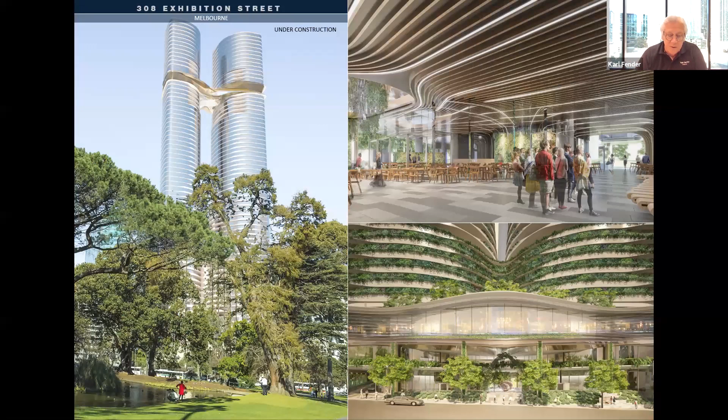308 Exhibition Street, under construction, paired a residential tower with a hotel and linked them with a sky bar for the public. And it took the parkland down below and ran it into the podium so that the base of the building became very much at one with that part of the city.

And this particular one, Queen's Place, also under construction, these 2 towers have got an incredible base full of home offices, studios, etc., and arcades. Melbourne's really well known for its arcades. So although these buildings become emblematic in the city and really give strength to the character and reputation of the city, it's the ground plane that really is important.

And I think that these buildings, plus others that we've done, really prosecuted the touch points of high rise and high density in the city - the building as a marker, the building providing mixed use, the building providing population to incentivize the public realm, and beautiful things for the public at the public realm.

These were all really extremely relevant pursuits or investigations with respect to Merdeka 118, as you'll see as we go through. Just very quickly, yes, we were designing the building from Melbourne, but Melbourne and KL, or Malaysia, are really quite close. We are just a 7-hour flight away from each other.

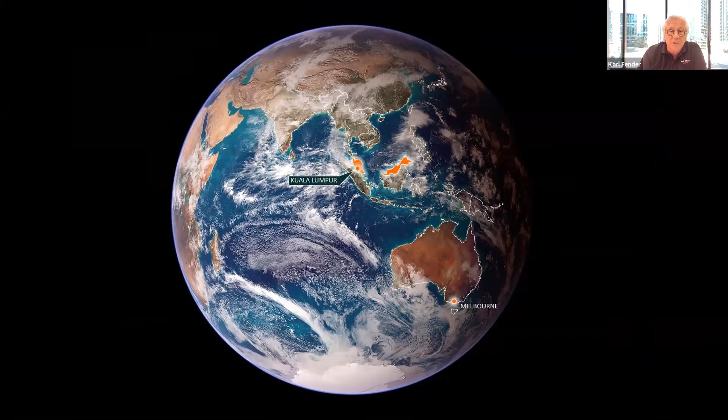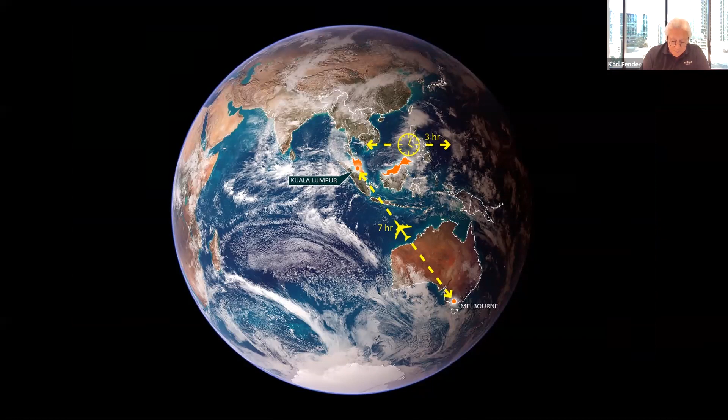We have a 3-hour time difference, 2 hours when there's no daylight saving. And so this was a very fluid and easy relationship to work with our client and with our local partners, GDP and RSP. So this was really lovely for us.

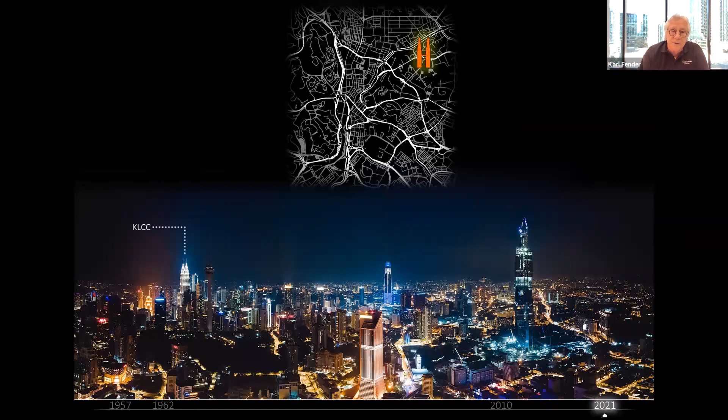We found coming to KL, what an amazing city. Love that city. It has so much intensity and vibrance.

And the buildings that came before it, the tall buildings, the Petronas Towers, the KL Tower, and now we have TRX - they've become icons in the city. As a visitor, I get a bit confused in KL still, I have to admit, because it's organic and there's a lot of traffic and a lot of trees, and using these major towers as kind of shapes in the distance orients me to where I am. And I really do enjoy that.

And they're starting to frame the city. They're starting to stretch the city. They're starting to create more energy at the base of where they occur, both TRX and Merdeka. And so this particular building of Merdeka is very, very important in the growth of Malaysia.

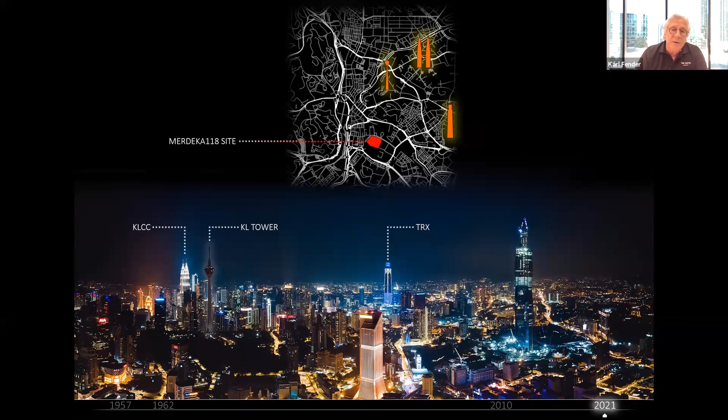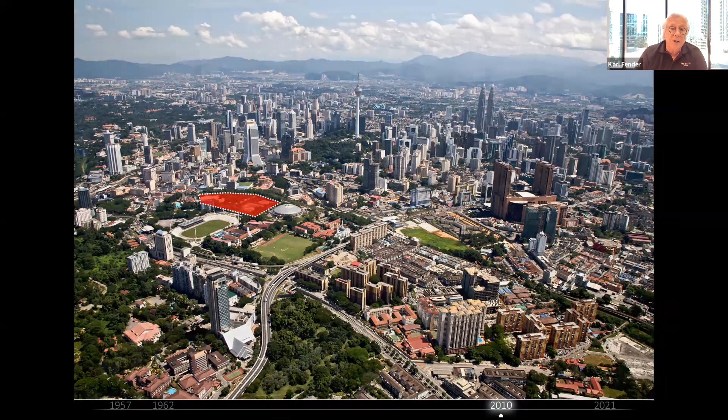But what a challenge - what a challenge to be putting this tower right next to Stadium Merdeka, where Tunku Abdul Rahman declared independence in '57. He must have been a great man. As the first Prime Minister, he states that he wanted to see a modern future for Malaysia based on the highly cultural history. And so for us to be putting a tower on this particular site and respecting the nature and history of Stadium Merdeka was really, really exciting.

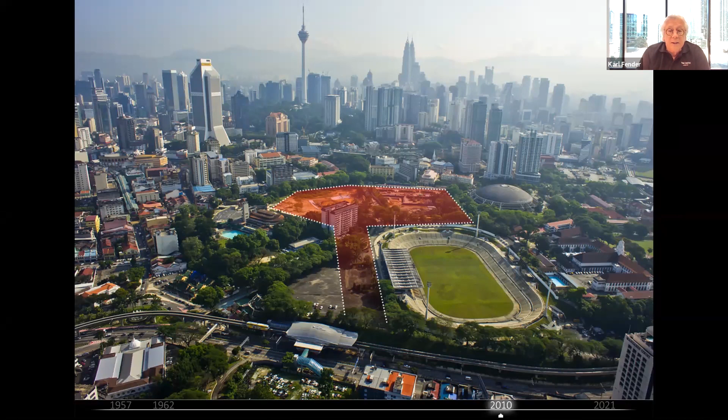The site, luckily, was able to extend beyond and across the front of Stadium Merdeka. So this gave us quite some opportunity to start putting Merdeka back into a nice format - the spirit of the place.

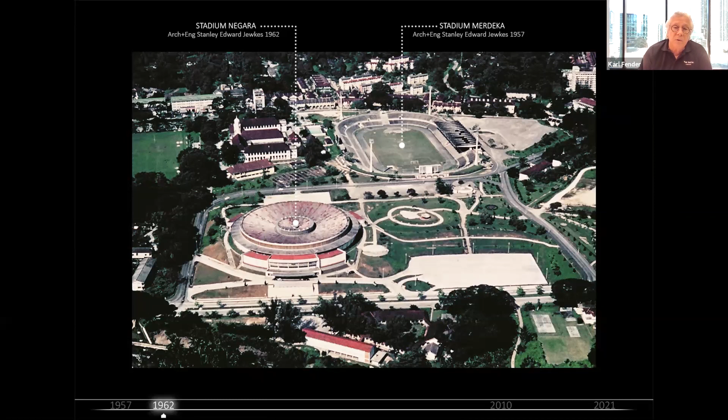Wow. Again, look at Stadium Negara and Stadium Merdeka back in the 50s, well, it must be in the 60s with Negara there. But it's got a park in front of Negara shared by Stadium Merdeka. And this was about community space, community gathering.

But, you know, if you look at it today, or when we first came there, the park was basically nothing - it was just sort of asphalt. And the front of Stadium Merdeka was also just asphalt, had a lot of motorbikes parked on it. And it seemed to have, it wasn't in our mind, but it had lost the importance of its heritage beginnings and what it should be offering to the public. So this was a great opportunity to give back.

And that was part of what Merdeka was all about. This wonderful photograph was very inspirational to us, particularly the raised hand, which now has been attributed to the design of the spire on the building, which is something I particularly love, because it's great when the community and the public start to invest their imagination in your building.

The energy of the place, we're next to Chinatown. That's a beautiful place. My wife loves going there on the many times we come to KL. Bustling, it's a bit interesting and a bit run down in parts, but very much a tourist attraction. And of course, the traffic and the monorail, all of these things give energy to our site, and our presence will help their presence, help the traffic if we handle it right, and help the whole precinct around Chinatown and around Stadium Merdeka.

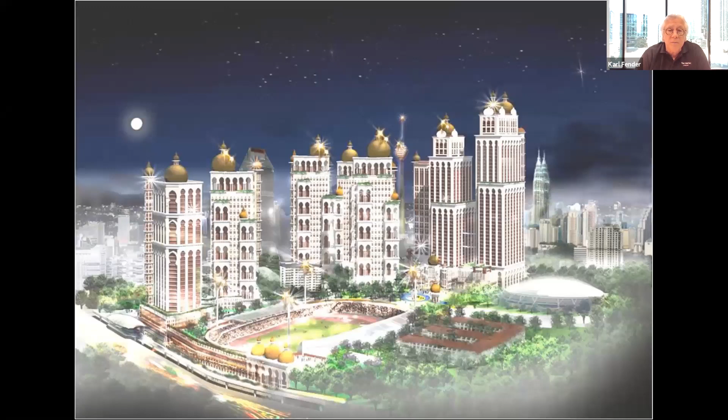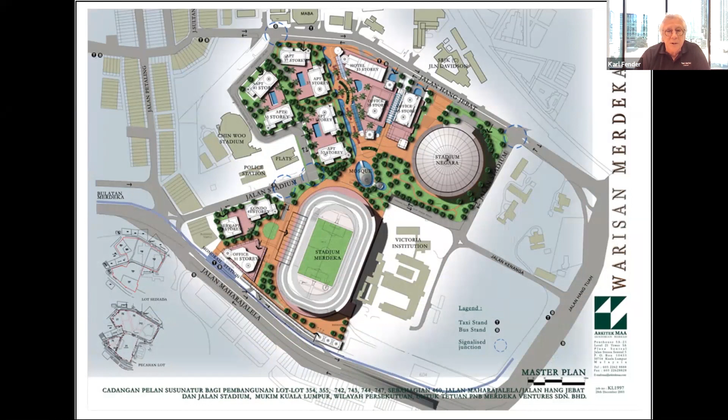When we first started, this scheme was shown to us. You can see there were thoughts about the importance of this site, and this was a campus style of project, and it invested itself heavily on Islamic and Malaysian symbolism. But because it was a campus, the buildings, and there were many of them, were all spread out. And the interstitial spaces between were really just connections, public connections, but no real place for public gathering or making parks.

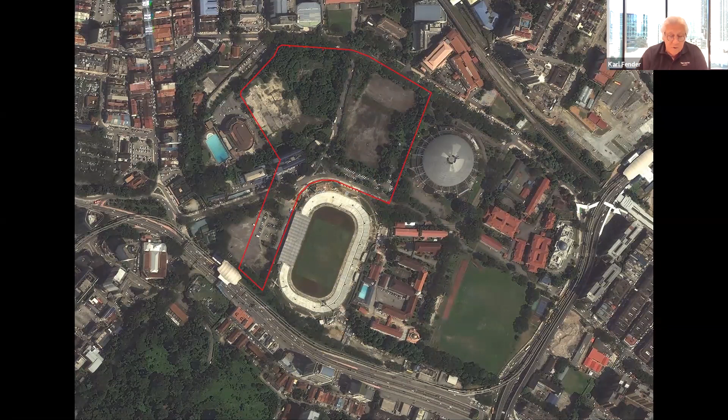So the idea of us coming to this site really was to understand the opportunity of maybe compressing the footprint and allowing a public park, allowing circulation around the building to happen, all to the benefit of the community. And so we had to start with a diagram, and this was our diagram.

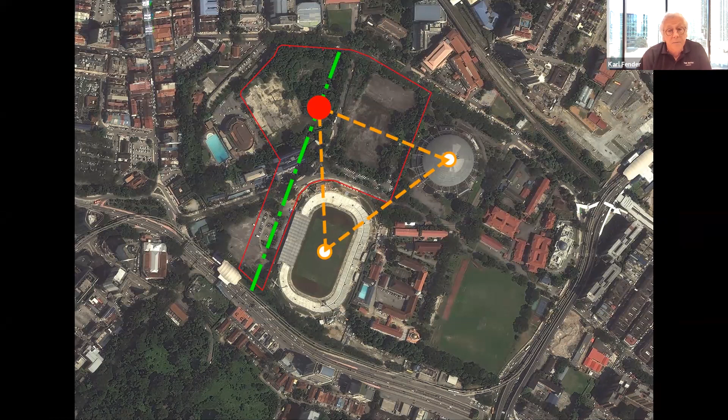And that axis excited us because on the one hand, it could provide a park on that axis to Stadium Merdeka, but it could also run right through the building and make the building available to the public, so that from Jalan Hang Jebat up at the top or the north, you could actually come off that street, come to the building, go through the building, and then go down into the park and through to Stadium Merdeka. And that axis will also provide in the future a beautiful museum by RSP and a mosque by GDP. So that garden that is on that axis will really become a focus and a destination for the people of KL and Malaysia and tourists.

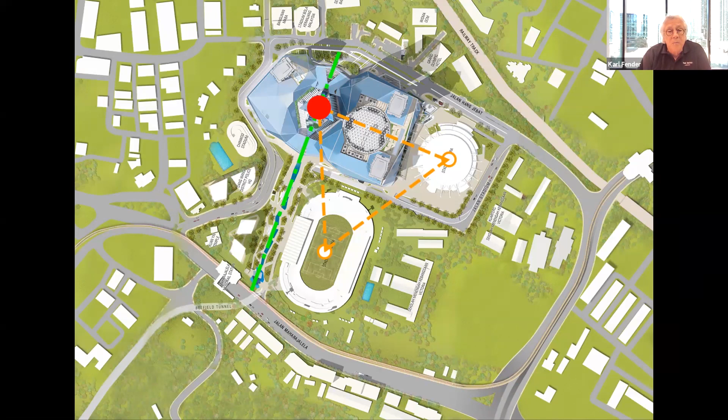And so there's the building in place now underneath the red dot. You can see that next to it is a circle. That's a glazed roof, which is obviously a reference to Stadium Negara, and a big podium containing retail, theatres, ballrooms, lots of facilities for the community. I ended up with the word community.

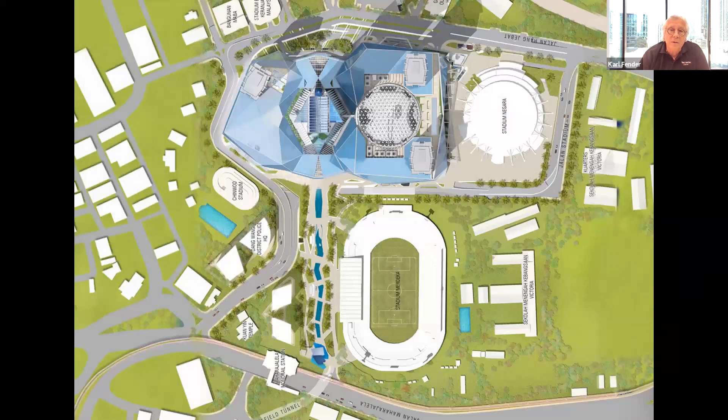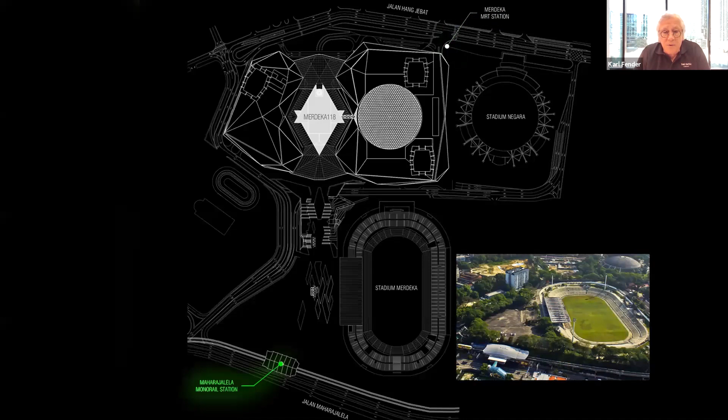The power of projects like this is enormous. And so again, this particular project has brought an MRT. It couples onto the Maharajalela monorail. It provides the park. The park, I think, is about 160 metres long by 60 metres wide.

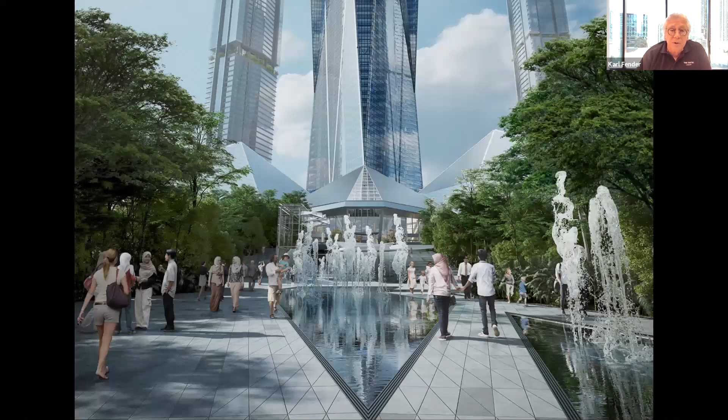It's a beautiful water park with water that comes from fountains, mists, cascades, waterfalls, ponds. And if there's an event on in Stadium Merdeka, the water can be turned off, and we have a beautiful pre-function park for the stadium for people to gather. And you can see here that the park is actually the carpet to the front door of the tower, Merdeka 118.

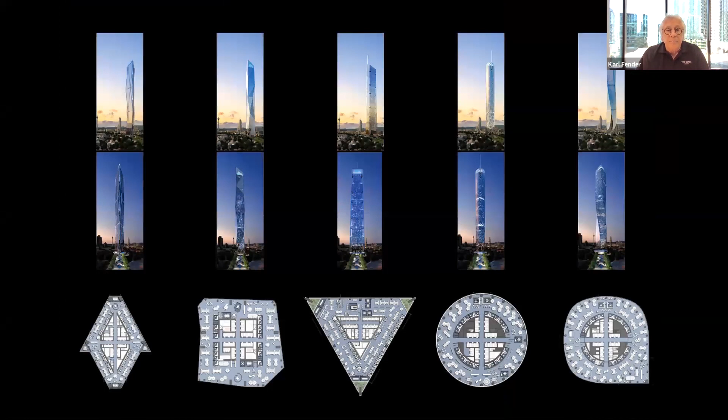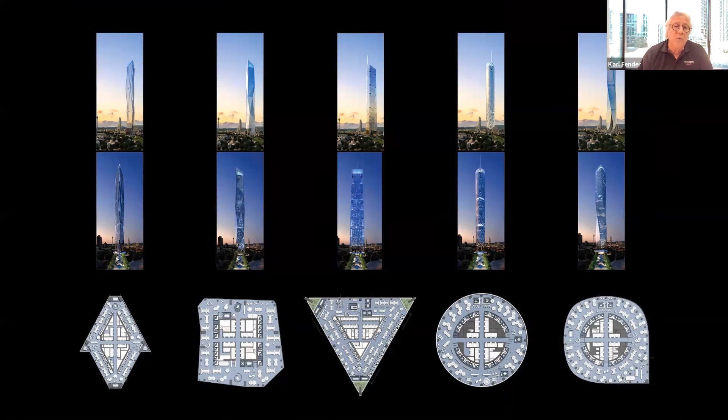We studied a number of different tower forms, obviously, as one does, just in the search for a tower shape that not only was appropriate symbolically in its place, but also disturbed the wind in the right way and became what we felt would be a very, very interesting building in the round, always changing visually as you see it from different parts of the city.

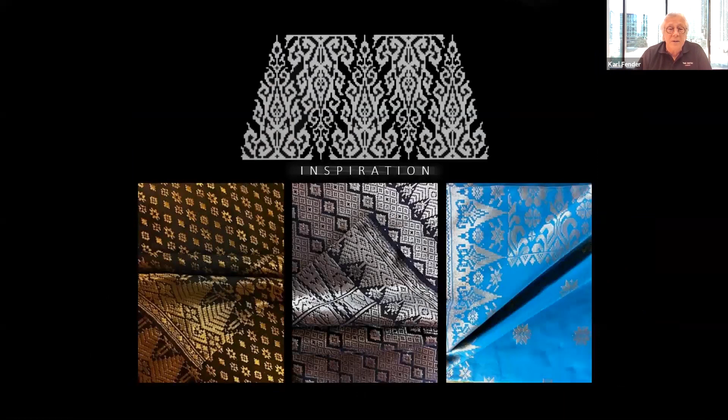And again, the Petronas towers and the beautiful plan forms which come from Islamic patterns, that inspired us, but obviously that's not what we were going to do. We were very interested in the Songket patterns of Malaysia, in the materials and the way that the metallic threads highlight those materials, and the way those materials change in different light and in different shapes.

And that led us to this building form, which is a series of folded triangular plates. We liken those plates to... when I was presenting to the Prime Minister, I said each of these triangles that form the fold lines of the building represent the different cultures and backgrounds of all the people that make the rich mix of the Malaysian community.

And then the fold lines are expressed so that they could be light pathways. So it's a bit like the threads in the Songket materials.

And the triangulation of the tower was then taken down into the podium. Many times the retail podiums of these towers become boxes, just big boxes for internal experiences. So we were very much of the opinion that the podium should form the foot or the pedestal of the tower, and in fact have the same kind of geometrical approach as the tower had.

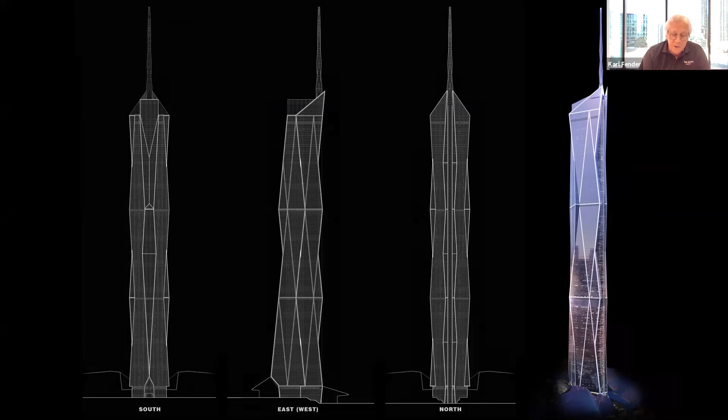And again, this shaping of the building also really helps to disturb the wind, and that decreases the wind pressures on this, which is in fact a 600-odd metre vertical cantilever from the ground. So you can imagine the pressures at the top of these buildings, and the more you can decrease the wind pressure on them, the more efficient the structure can be.

This diagram shows you in section that the building comprises a centre core, but also 3 belt truss zones. And it's in those belt truss zones that the transit floors for the elevators occur.

There are 87 elevators, and just some other interesting facts: 18,000 facade panels. Each facade panel is 2 windows. And 8 kilometres of LED facade lighting.

That's going to be quite wonderful because it can be programmed for different light travels, different patterns, and it will go up the spire as a sparkle type of light effect.

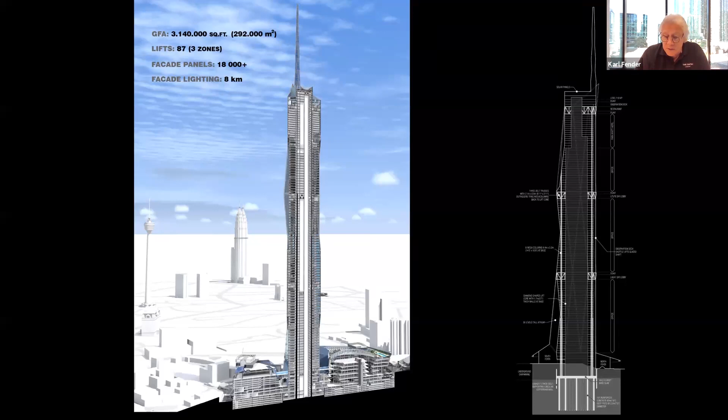Just if you ever ask yourself, how much does a building weigh? This building weighs in the order of 13 Titanics, which is about 685,000 tonnes. These are huge structures, and to watch them being built is a marvel.

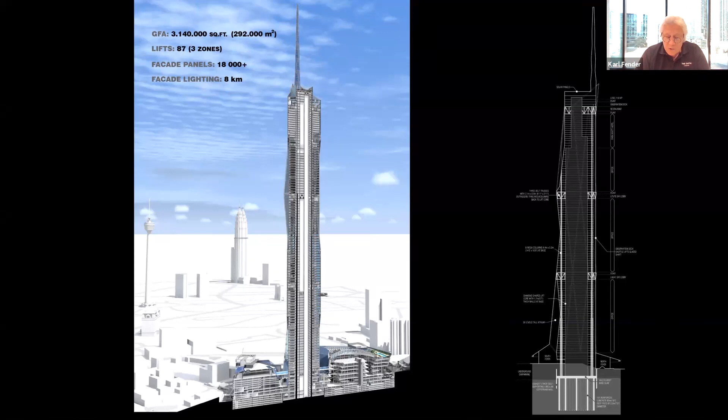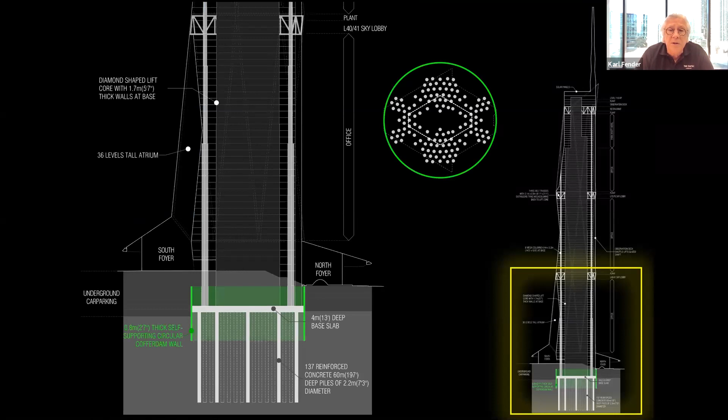If we just start looking at how the building structures, starting at the base of the building, we have the cofferdam. It's about 0.8, maybe a bit more, metres thick, which went 20 metres deep and encapsulated the piles. There are 137 piles.

They went down 60 metres, and each pile was 2.2 metres diameter.

Then on top of the piles is supported the raft slab. That slab is about 88 metres diameter, and it was 4 metres thick, poured in 3 pours: 1 contiguous pour under the building and 2 flanking arc pours.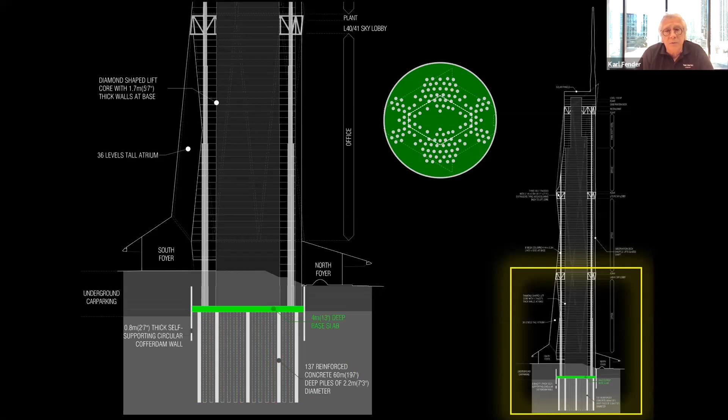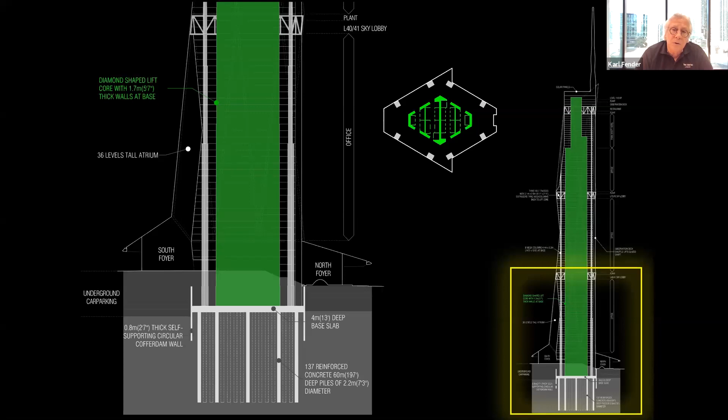The core itself, well, the walls at the base were almost 2 metres thick in a diamond shape, and that created a floor plate, particularly for the commercial, of about 12 to 13 metres deep, which is a very, very efficient, beautiful floor plate depth from curtain wall to core for commercial use.

The mega columns running up the building are 4 metres by 3 metres at the base. And then you see the belt truss zones with the outriggers connecting to the core.

This fantastic diagram just showing you how all of that works. And this, in fact, creates alternate structural pathways, so if there's catastrophic structural failure, the loads can find other pathways and not just collapse.

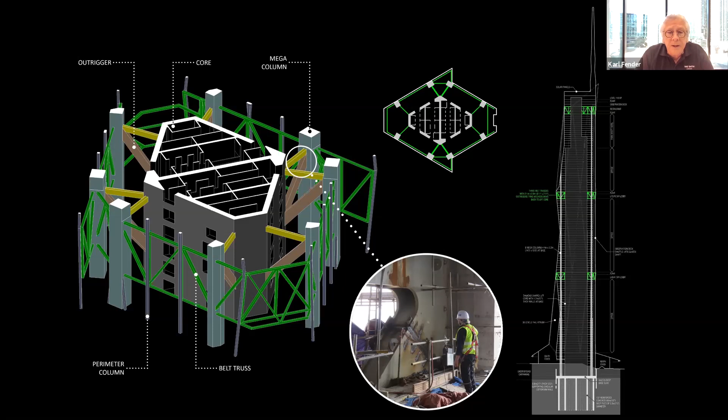Just a photograph at the top of one of the outriggers. The steel in those outriggers is 100 millimetres thick, just enormous.

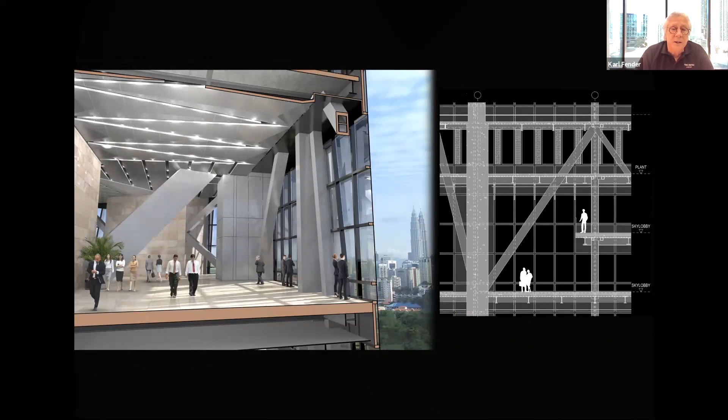And here we have just an artist's diagram inside one of the belt truss zones. They become the transit zones, and that's where you can really understand the strength and structure of the building. So these are fabulous public areas throughout the building.

This just shows you on the left-hand side the green floor plates, the top one for the hotel, the bottom one for the commercial. And the commercial floor plates here, that's the maximum floor plate.

And as the facade of the building expands and contracts, we go from a net floor space of 1,900 square metres to 2,300 square metres net lettable area. And the hotel floor plate has about 20 hotel rooms per floor.

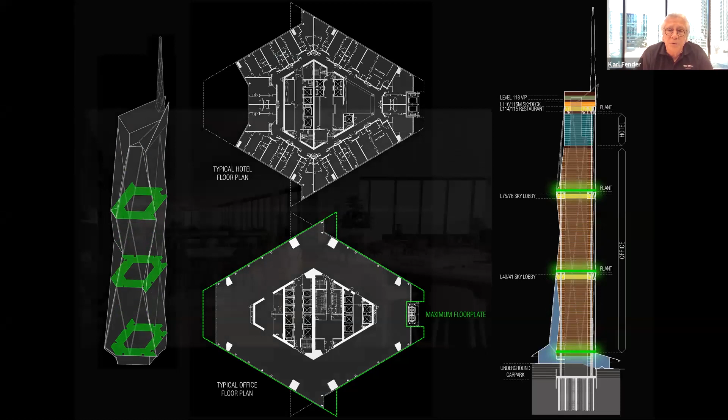The offices are fed with services, air particularly, from below the floor, and the return air is taken out through the ceiling. So personal comfort is guaranteed at any place in the floor plate by personal adjustment at a workstation.

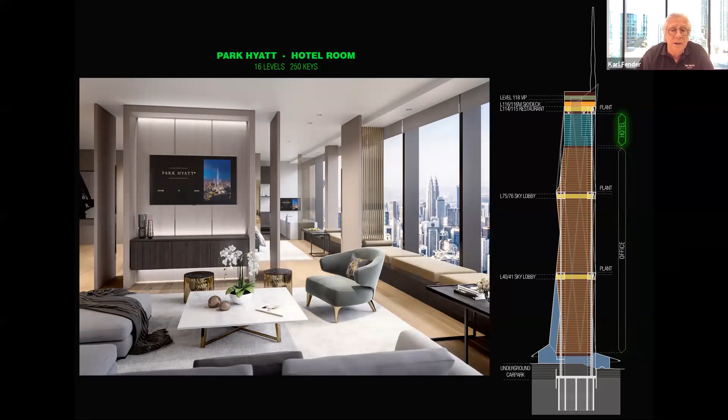A typical hotel room designed by GA Design out of London, with fabulous views of KL, and the hotel reception on level 75.

Once you're in the building, you ride the elevators up to level 75, and that's where you check in. From there, you go to your room in an upward direction.

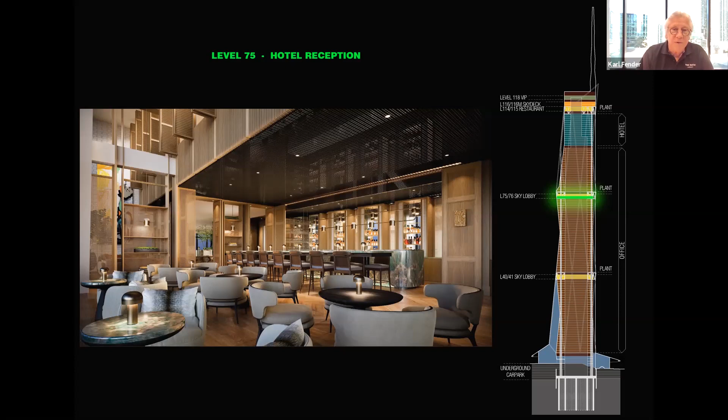Many of you will have been into some of the modern hotels where you go up to the higher level hotel reception, then go down to your hotel room. For me, I always get lost, I never know what I'm doing, but this one is very straightforward.

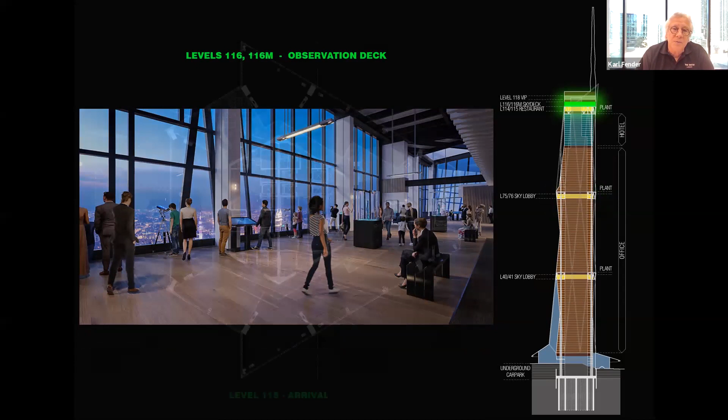On top of the building, again for the public, there's an observation deck. This observation deck is really going to be a fantastic destination for tourists, for Malaysians, for people in KL. It's being designed at the moment, and it's very, very exciting.

Level 115 is where you arrive from these elevators, glass bullet elevators, two-story, which take you to either the sky deck or a restaurant below. And from those elevators, you go up an escalator to level 116, which is the observation deck.

This will be very carefully curated. I think this will be the best observation deck in the world.

The curation is very exciting and will tell some marvelous stories. You'll also be able to step outside and sense the fresh air that the birds sense at that height.

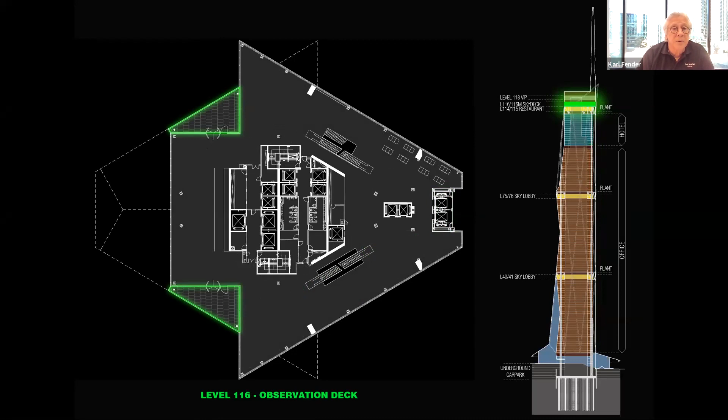From there, you go to 116 mezzanine, and that's a floor of thrills. So stay tuned to that - that will be interesting indeed.

And this section just shows how the sky deck works at the top of the building.

We're going to go down to the bottom of the building, and this is a section through the reception halls. The hall on the right is the one that faces onto Jalan Hang Jebat, and that has the entry for the hotel and the entry for the office and the retail, one of the retail entries.

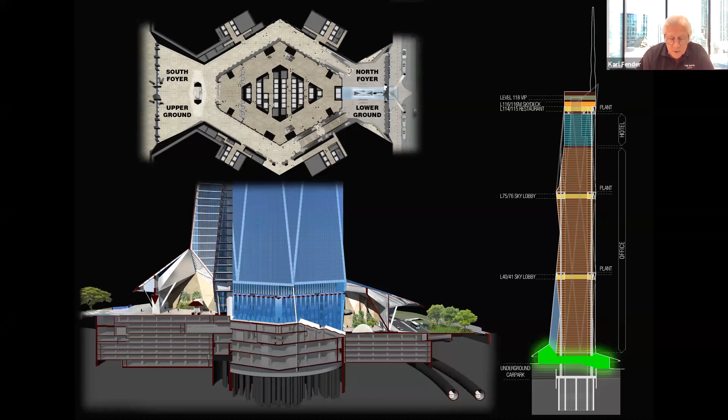You then climb 10 meters up escalators or stairs through a glazed corridor to get to the top atrium reception hall. And that hall faces the gardens, Stadium Merdeka, and Jalan Maharaja Leila.

On arrival, you come under a huge canopy. This is the floor plan of that.

You can see the hotel lobby and the commercial lobby, separated by a fountain, but the volume of that atrium, which is about 30 meters tall in its highest place, stays quite remarkable.

When you arrive at the entry to the building, you arrive under this grand entry hall, which unusually, I think, gives you a view of the building above.

So often you arrive at a building under a canopy and you've then lost contact with the building above. But it's the entry into the building, the thought that we had for how these large-scaled atriums - and they had to be large to be an appropriate scale with a building of this height and stature.

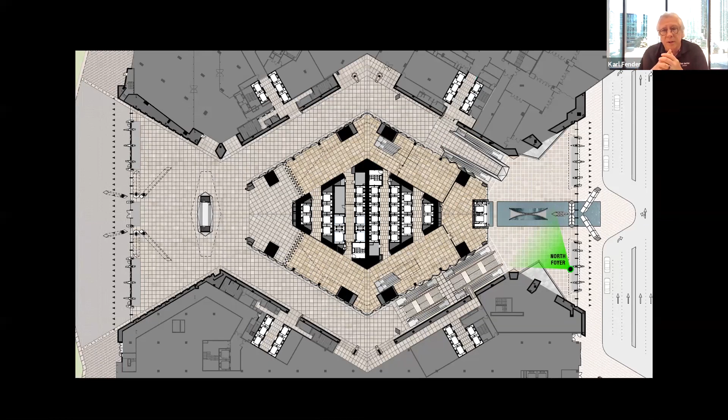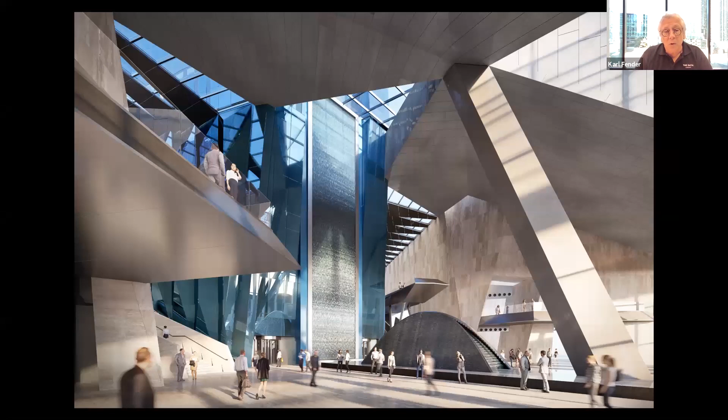As you come into the hall, this is on the commercial side - the hotel side is on the other side of the central water feature. But you can see the skylights will let various patterns of changing light come through the building at different times of the day.

The wall in the middle is a glass wall to the elevators that are the observation elevators, and they will have water streaming down the outside so that it moderates the experience of the elevators taking off and arriving.

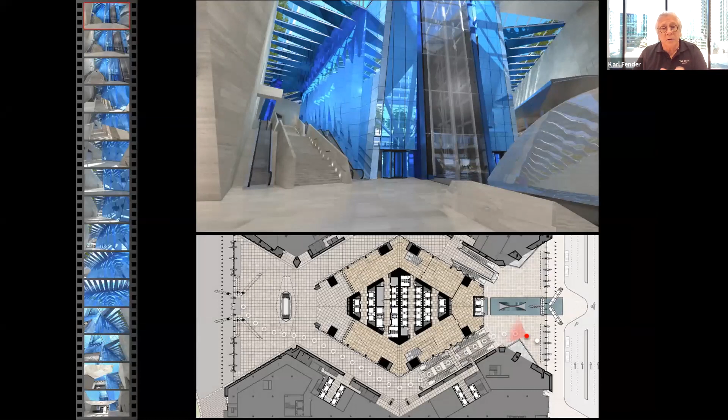As we go into the building, we're now looking at the core of the building come down as a glass crystal into the travertine stone walls of the atria. And as we go through, we hit the escalators.

We have a VIP entrance on the right, and we ascend the escalators or the stairs with the modelled glass wall on the right-hand side looking into the cores of the building.

And the wall on the left separates the retail. We can get into the retail from this walkway.

We start to head to the top atrium. And as we look up, we can see through the glass roof the building above, and coming around the corner into the Maharaja Leila atrium.

And looking back, this is the Merdeka bar, looking a bit radioactive.

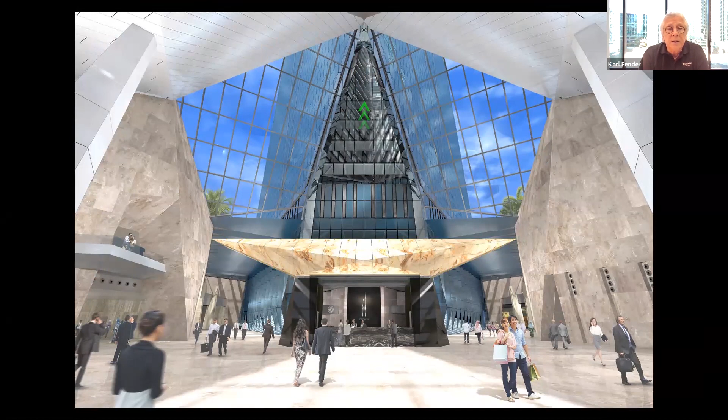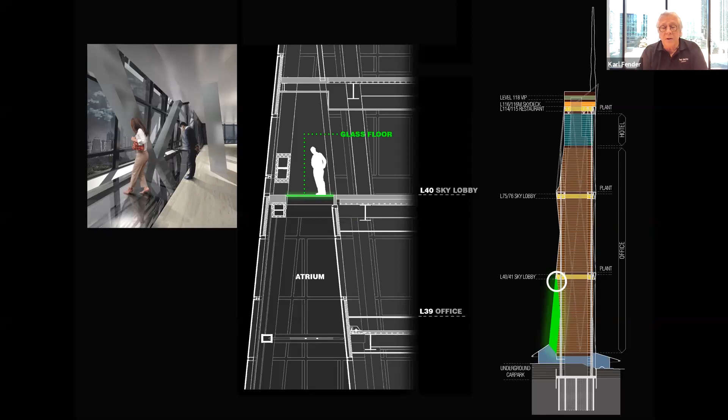And behind, where the green arrows are, is again a 35-story atrium, which acts as a chimney. So that as the warm air rises, it rises through that atrium, being the highest place, and it's then extracted via the plant room. And if you're game enough, you can stand on the glass floor and look down and see the comings and goings of the atrium, 35 odd stories below.

This is a diagram of the podium with the retail on the right and the west podium with the ballroom and the theatre. But the important thing about this diagram are all the red arrows. This means that people coming to the site have many opportunities of getting into the building, of discovering, of finding the retail, of walking through the actual tower. It's a building that gives a pedestrian network back to the area, and an interesting network.

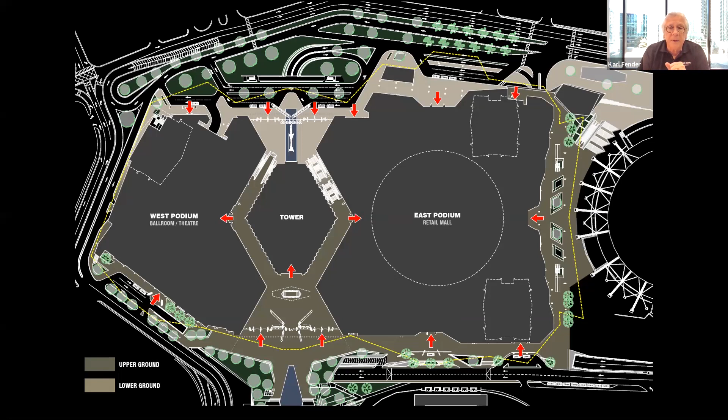And that network happens from the perimeter of the podium. You can see the podium here is the crystalline form, also cracks open here and there on the roof to provide very richly planted roof gardens and swimming pools for the residents who will be here in the future.

The building, the podium touches the ground in certain places, but people can walk all the way around this podium without getting wet and in shade. And that's another unusual thing about this retail offer, and that is that you do not have to go inside to get into a protected environment. You can circulate the perimeter of the building.

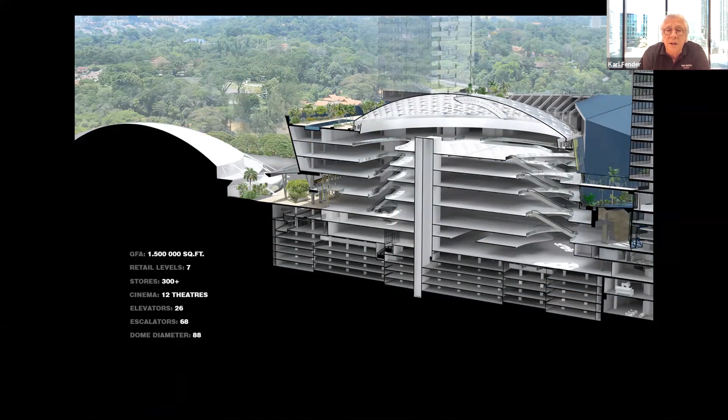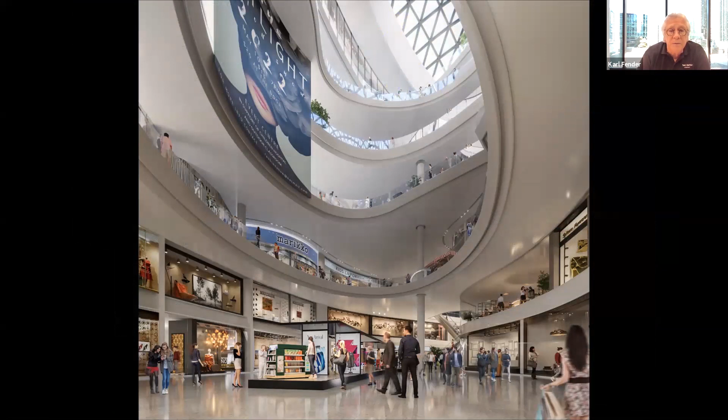Part of the building comes down to basically mask some of the subway infrastructure, chimney, and this section goes into the retail and shows a section through the glass dome. It's an 88-metre self-supporting tessellated glass dome, which brings light all the way through the building and allows you from within the building to look up, to see the buildings above, and to know that there's something up above.

A lot of the problem with multi-level retail is people don't actually go to the top levels, but we think that the top level of this will be so interesting that it will become a destination, and it will take people through the 6 levels of retail below it.

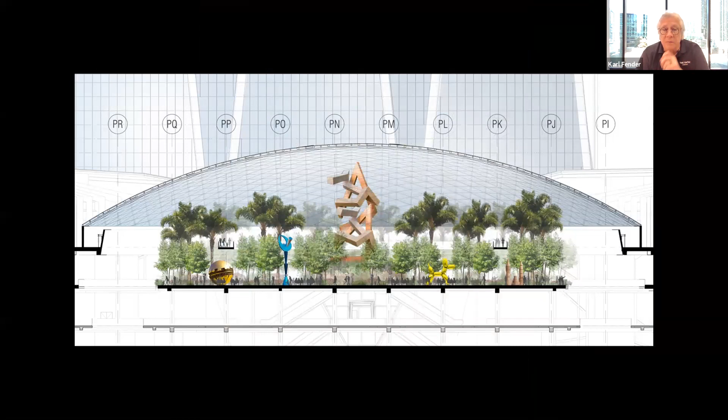And an early study, we've been looking at how the top level of this can be used, but just an early study to say this should be a place of destination, a place people want to be, and it should be an attractor for people right through all of the retail.

And then we have Negara Place, which is an outdoor but again shaded place. It's for food stalls, and it connects between the retail mall of Stadium Merdeka and Stadium Negara, which is being refurbished into other uses for performance. So this will be a really important place.

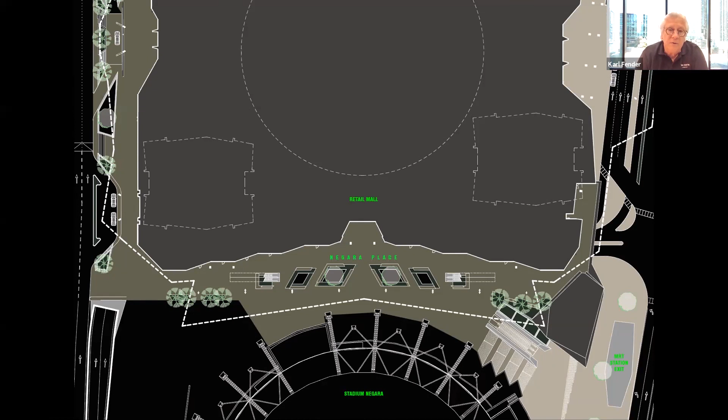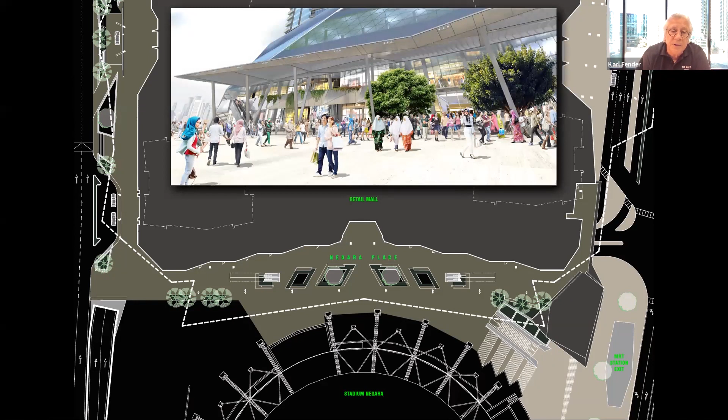Again, the love that Malaysians have of outdoor eating, and certainly the enjoyment that I get when I'm taken to some wonderful outdoor places. And we hope that this will become one of those. So this is a place that was very, very much fun to design.

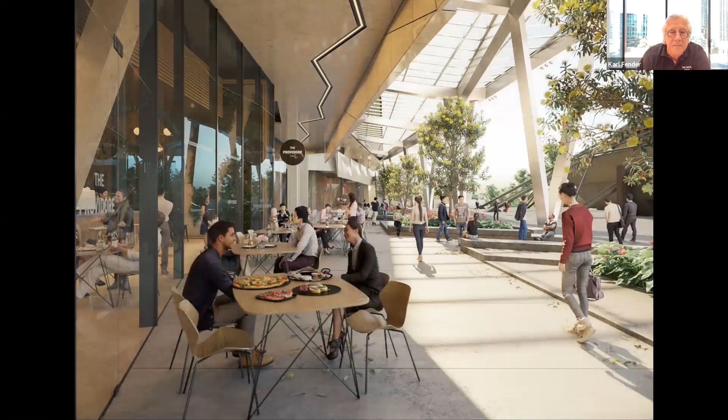A view of the retail entry on the south side above Stadium Negara and Stadium Merdeka. And you may have noticed a little circle that was to this bridge.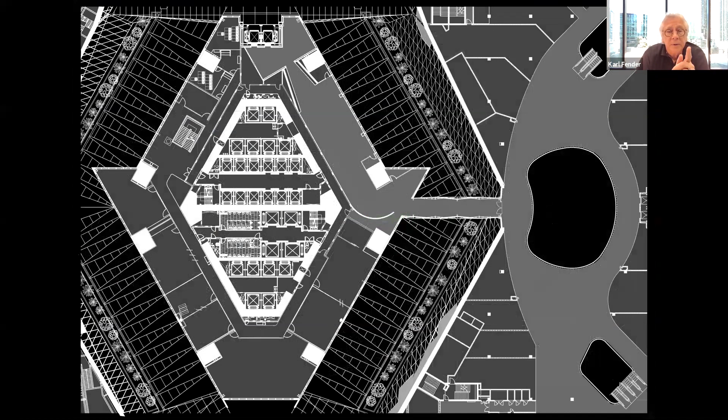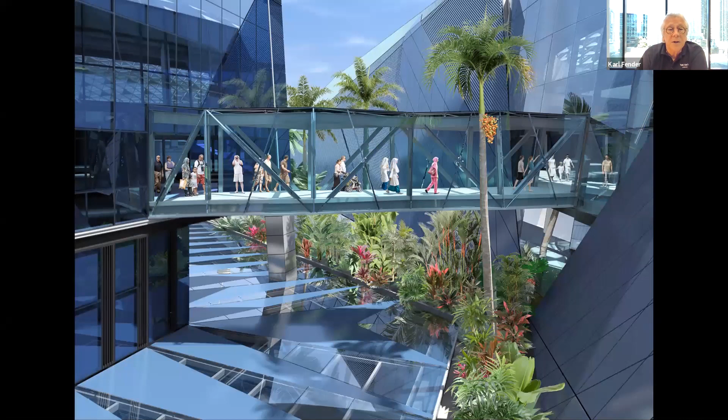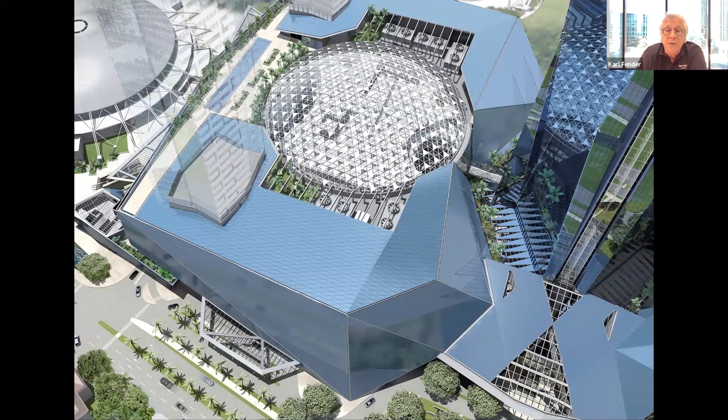And this little bridge takes people from the end of their sky deck experience across into the retail and to the top levels, or I think it's level 5 of the retail. And so people, having been stimulated in the sky deck, will then have the loveliness of retail stimulation as they come down. And this is the bridge that takes you from Stadium Merdeka across to the retail and over the gardens below. And here you can see the retail dome, and on the right, the gardens and that little bridge link.

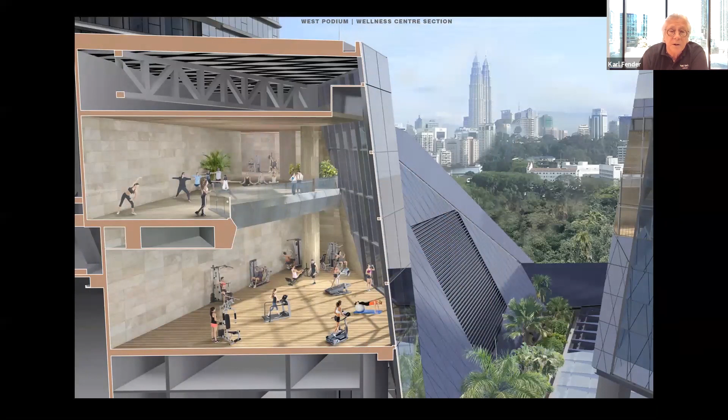Just a section through the building there, a wellness center built into the roof space, which again has views of Petronas Towers and the gardens below. So the building really has got many things to give to many people, whether they be workers, visitors, etc.

So we're talking about contribution. And one of the things buildings of this intensity and power should do is give back. And buildings like this can become producers rather than consumers. They can produce energy, they can produce lifestyle, they can produce opportunities. And I think that's one of the major challenges for any taller building, particularly when it comes down to the ground plane and what it has to offer the people that are not involved with the building itself necessarily.

But sustainability was incredibly important. And this, we worked with Terrapin Green out of New York, and it's got—I won't go through all of this—but it has everything you would expect and more in order to create a green star rating.

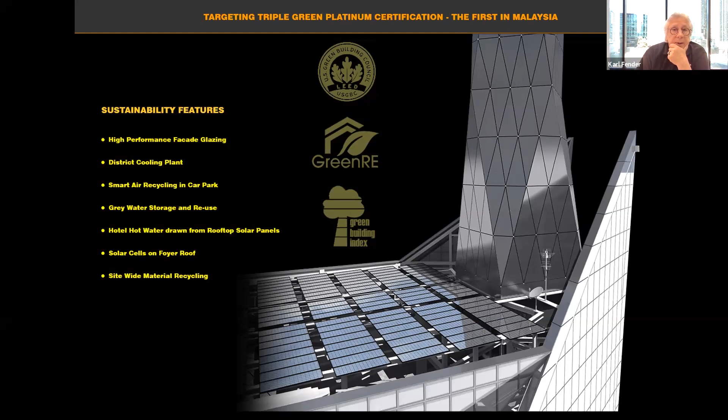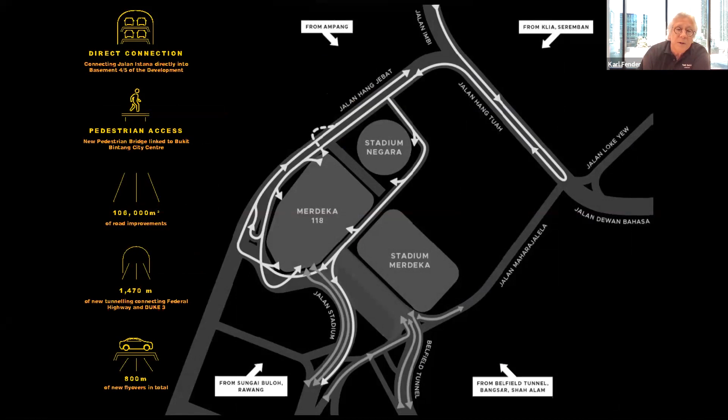This building gives back so much to the area in terms of road improvements, tunnels which take traffic off the surface, and pedestrian bridges. That's what happened with Petronas too. So even though you're introducing thousands of people, you're actually helping the traffic flow and the traffic situation.

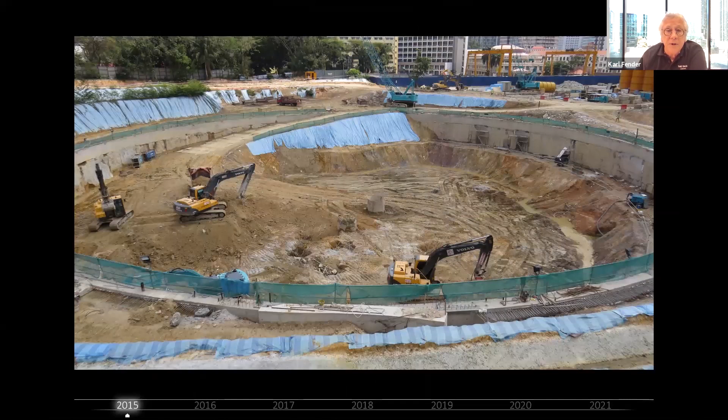A little bit about construction. This was the start of the cofferdam, exactly where the building was going to be placed and is now placed. The cofferdam with the heads of the piles - 137 piles, 2.2 meters in diameter.

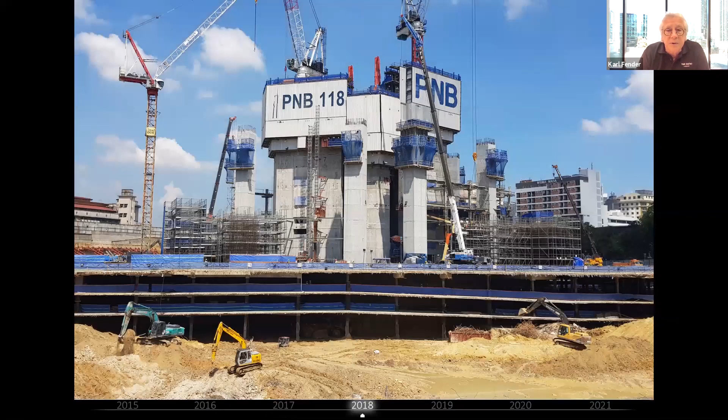This was the reinforcement for the raft slab - rebar, 42 millimeter diameter, 8 layers. The sort of steel and structure involved to support a building like this is absolutely incredible. And you get the scale of the podium and even the core once you start to look at the earth-moving equipment below.

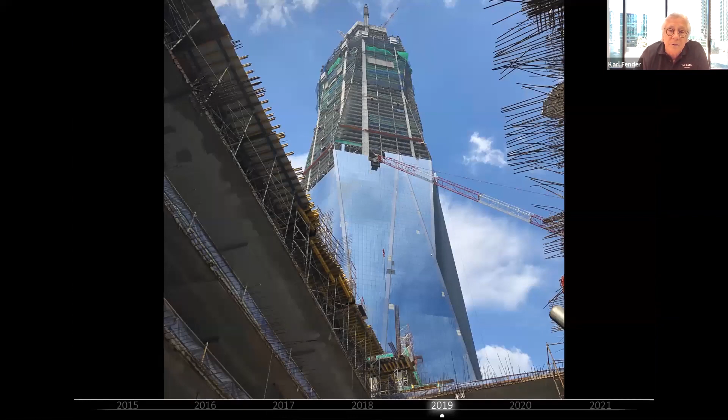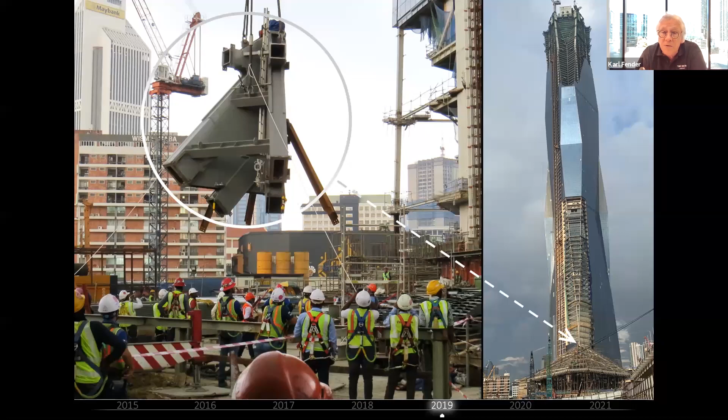The cladding starting to be applied. And some of the structure - this is one of the nodes at the top of the South Atrium. The steelwork is just phenomenal, they are art pieces, you could put them in the gardens as beautiful art pieces. You can see where it goes at the top of the atrium there on the south facade. The atrium itself is huge, the steel enormous - you can see that by the scale of the people working on there.

This is one of my favorite photos - of Gerard Van Beek, who comes from FK and has been resident on site throughout construction, working with RSP and GDP. Gerard has just been there painstakingly ensuring design conformity and looking at all the little details that really make a huge building like this successful.

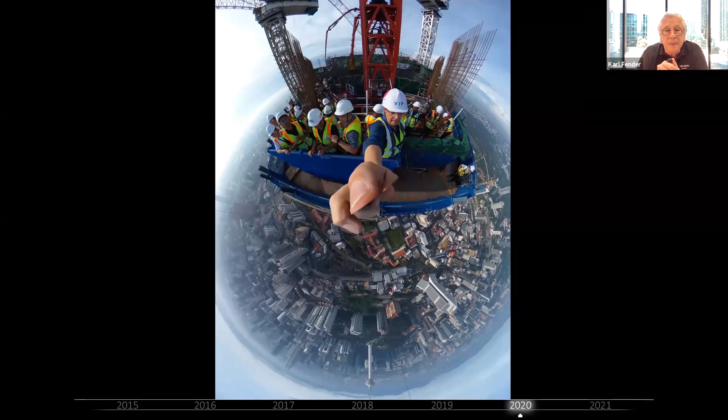I'm coming to the end, and I was almost coming to the end on this day. My shirt is soaked, I am wet, I'm disheveled, I'm tired, I'm slightly distressed, and I'd only spent 2 hours on the site. It was an incredibly hot day, and walking around in the boots and the high vis, I just had to think about all the people that work on that site.

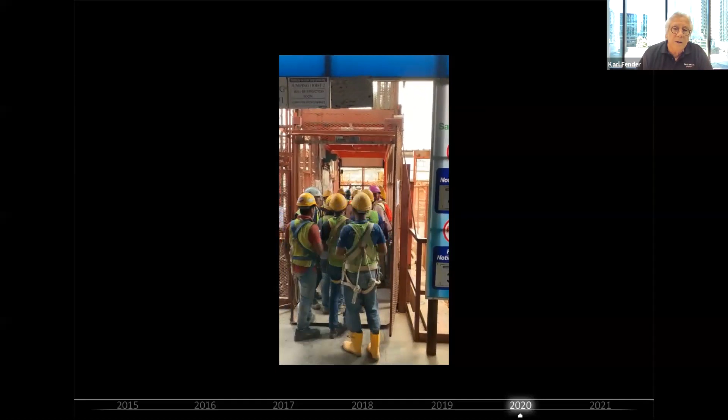There's between 2,000 and 3,000 workers on that site every day. The logistics in keeping them appropriately moved through the building, keeping them fed, keeping them safe. There've been, I think, 40 million man hours to date, and there hasn't been one catastrophic or major injury problem. So this is a tribute to all the people involved in running this site, and we should never lose sight of the workmen, the artisans that put all of this together.

And so with that, I'm finishing. I hope I haven't gone too long. I would just like to finish with a little apology - that we, as a team, didn't take you to giving you the highest building in the world, but second highest. Not so bad.

Any rate, I actually don't think too much about the height of the building. I think the height of the building is temporary - it doesn't matter how high you build, someone will build higher, and what does it really mean any rate? What I think is far more important in a building like this is the way it marks its place, the way it pays respect to the culture, the history, the way it makes a statement about Malaysia's view about going forward in a modern world, the way it looks at technology, the way it deals with heritage, the way it gives back to the community at the ground level. I think these are the really important things.

And also the environment that it gives to all the workers - not just the workers that made the building, but the people that will work inside this building and work in comfort with a view, and hopefully with upliftment.